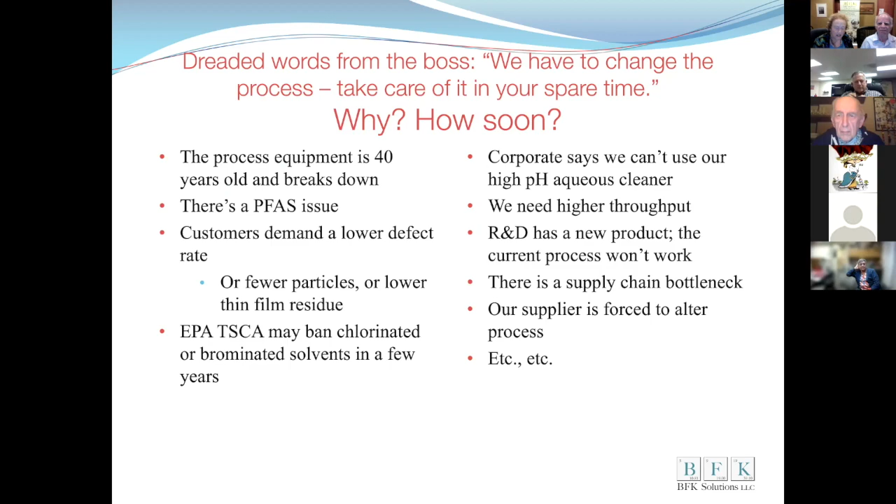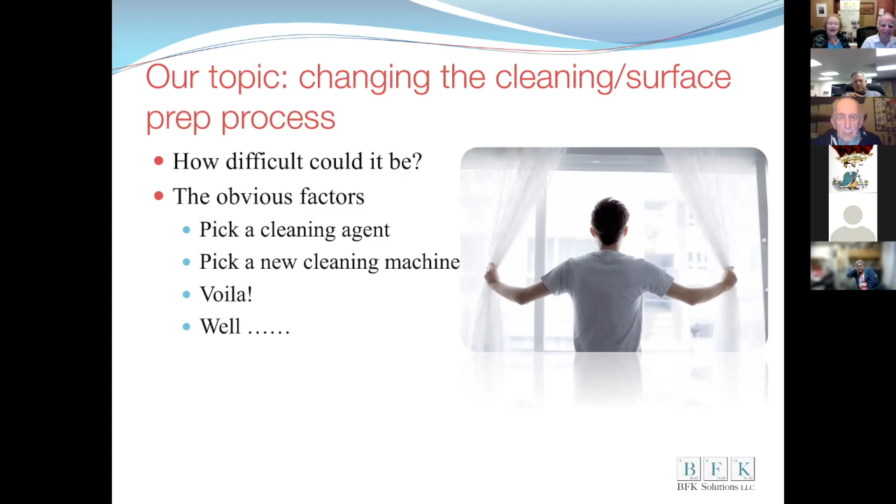Next. So you know that our field is cleaning, surface prep, critical cleaning. So that's what we'll talk about. The slant of this presentation is cleaning, but the approach applies to pretty much whatever you're doing. But how hard could this be? Your boss may say, pick a cleaning agent, pick a new cleaning machine, and voila. Well, unfortunately, next. Things can go wrong.

So we have a few what we call ideal scenarios. And these are some of the things that involve the costs other than the equipment and the chemical. And we say ideal because we're saying that everything or almost everything goes right, or goes right the first time. These are estimates. They're not really case studies, but they are based on our experience, our observations in critical cleaning and surface prep. And as we've said, the principles that we talk about here apply to other processes as well, not just cleaning.

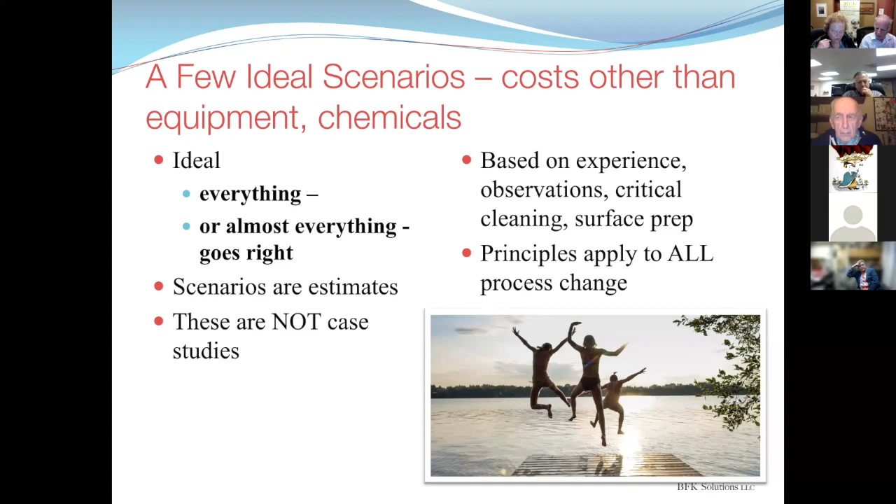But your team has to have the right people so that you get all of the players that you need at the table. You need to begin with the end in mind. In the case of cleaning, it's how clean is clean enough. And the important 2 C's, communicate and coordinate, always necessary.

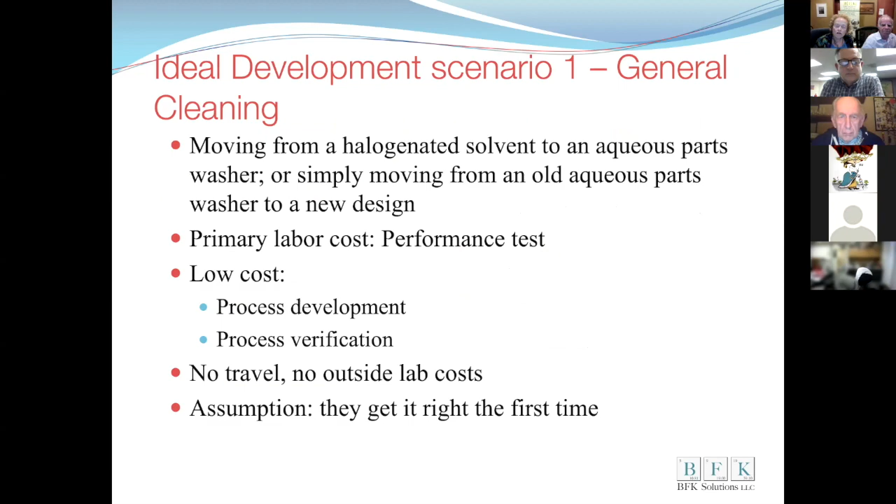Right, beyond the equipment. And now the second one is also with a general cleaning application, but switching from a halogenated solvent to a non-aqueous process. And we're assuming that we're going to be using a flammable solvent for this. Because a lot of halogenated solvents are under the gun and may be heavily restricted and or banned. And a lot of the replacements are flammable.

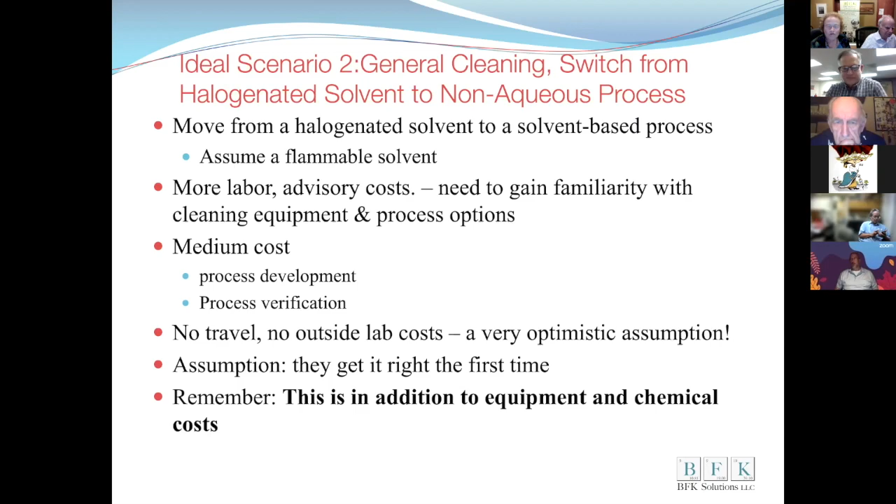So there's more labor and advisory costs because we figure you're going to have to take more time to learn about the cleaning equipment and process options. We're figuring medium costs for process development and verification. No travel, no outside lab costs. This is real optimistic. Again, this is home and garden television. You solve it in a short time. The Property Brothers come in and fix up your house in shades of gray, black with bright colors, and it's gorgeous. But again, here are the costs without equipment and chemicals.

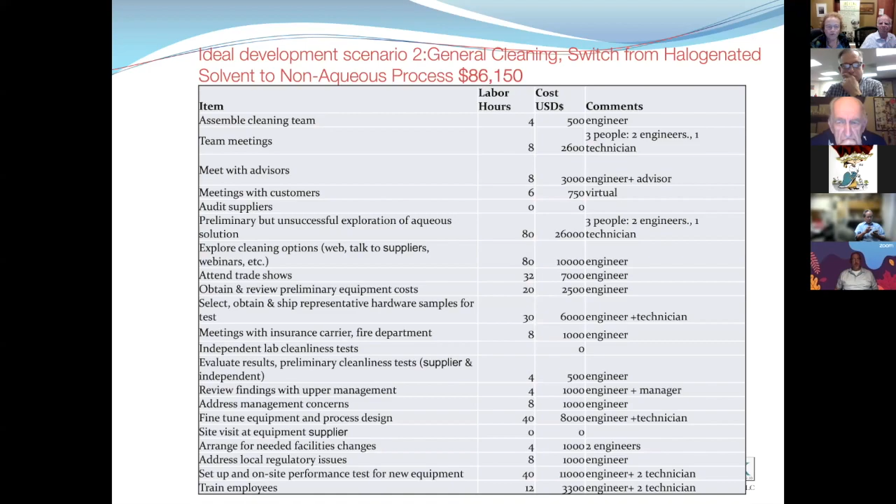And now we're at 86,000 because it's a more complex project, and there are a lot of different things that you have to consider when you're dealing with a new solvent or flammables. And that's in addition to buying, say, a small flammable solvent degreaser, which starts at a couple $100,000 and then moves up. And it allows for things like fine tuning the equipment and training the employees because it's different. It's a different process.

So then we get into what we'll call high precision. Again, moving from a halogenated solvent to low flash point, but you've got lots more regulatory and permitting issues. Maybe you've got NADCAP involved. We're assuming that the manufacturer understands the process not just downstream, but upstream. So you know what your suppliers are doing. That is not an automatically good assumption.

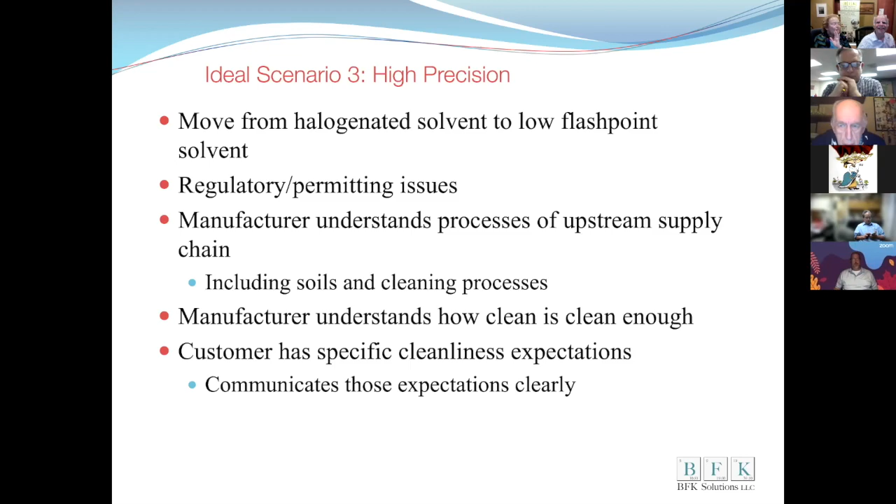We also have to assume that you as the manufacturer understand how clean is clean enough. Sometimes you know it's clean enough, you're not sure why. And then we have to assume that the customer has specific cleanliness expectations and communicates those expectations clearly, intelligently, and rationally. Again, we're in Disneyland, but next, please.

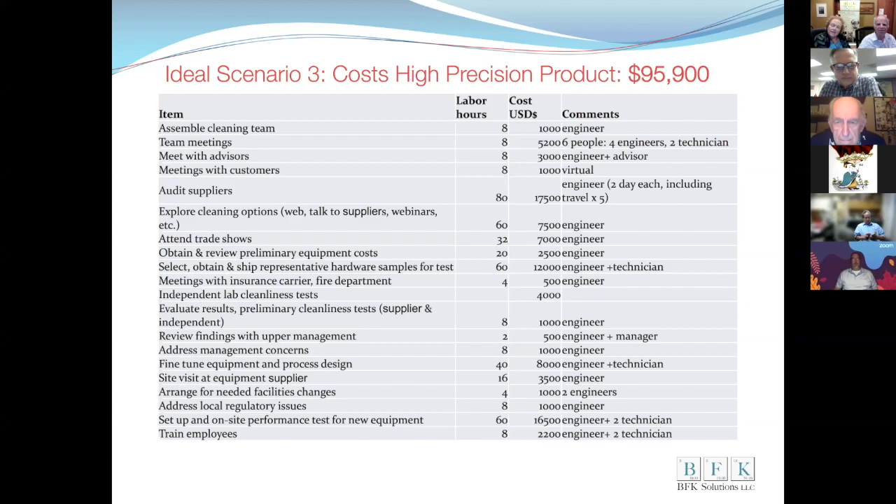So again, we've moved up to 95 to nearly 96 grand, and we're getting into auditing the suppliers, talking to suppliers more and more, trade shows, that kind of thing. You can say you're all wet on this, Kanegsberg, but this is based on things that we've come up with, and it's pretty optimistic. And these are also things that people don't really track because different parts of the company are involved.

But everybody thinks, oh, we have to be worried about the cost of the equipment. We have to be worried about the cost of the chemicals. These are not in these charts. This is worrying about the cost of not messing around and doing it right the first time.

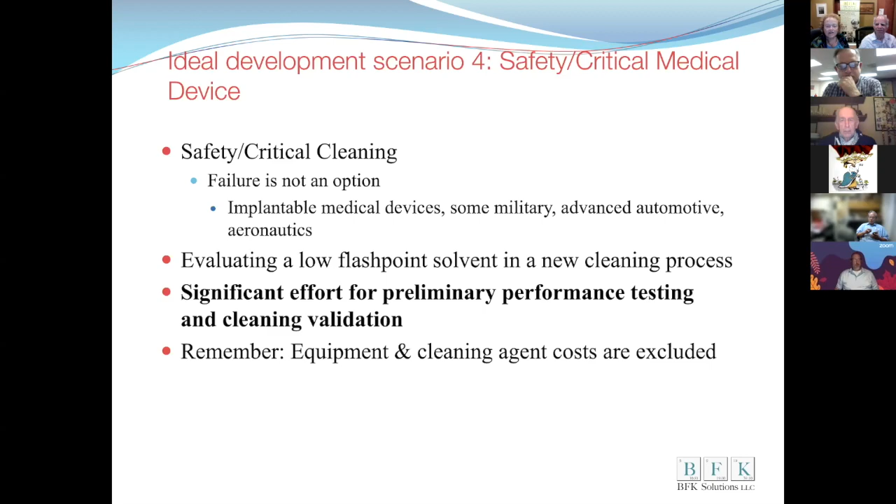Now, scenario 4 is safety critical cleaning, things like medical devices, some military, some advanced automotive, aeronautics. Safety critical means people's tushes fall off if it doesn't work. Yeah, it's got to work. And we're assuming that they're moving to a new low flash point solvent because, again, a lot of the halogenated solvents are under the regulatory gun. And there's a significant effort for preliminary performance testing and cleaning validation. And again, cleaning agent and cleaning equipment costs are excluded. Next, please.

So we've made some really hilarious assumptions here. Everything's right the first time. The final fabricator and key suppliers work seamlessly and harmoniously. There are no false starts. There are no mistakes. People say, I'm going to choose this piece of equipment, this cleaning agent. They get it right the first time. Management doesn't get squirrely or change its mind. And if it's medical, the FDA is deliriously happy and has no comments, no reservations, and wants no changes.

So this comes out to more like, we're assuming we're at an implant, close to 300,000. And if you have 2 different medical devices, you've got to repeat the evaluation. In red, there are some additional tasks here because of the validation and testing and addressing any concerns from the control agency, whether it be FDA or the military, whoever's involved. So there are very significant costs at that level. So we're being very optimistic. This is when everything goes right. Again, highly idealized and optimistic. The costs, even for well-planned projects, can be much higher.

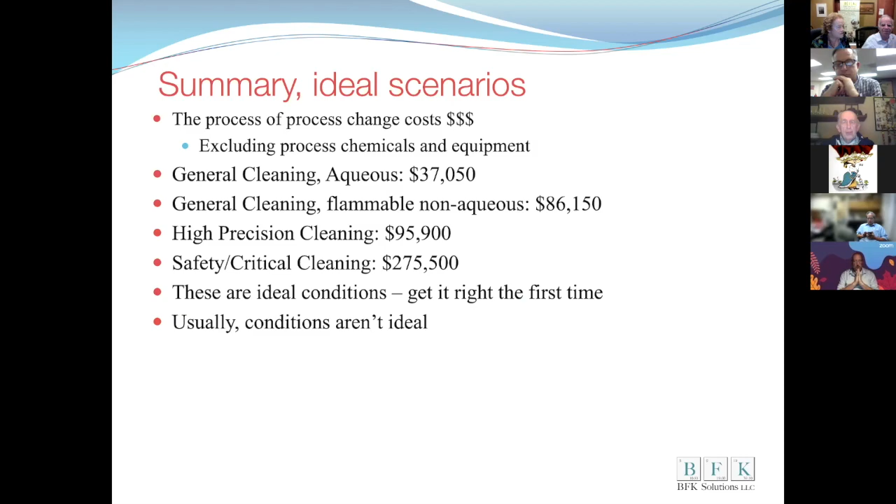So for general cleaning, 37 grand for going to a new aqueous system; going to a flammable system from, say, halogenated, 86 grand. Then it goes up to 95 grand for high precision. And when you get into the really heavy duty safety critical category, upwards of 275 grand. Usually conditions are not ideal. Right. So these are all what happens when it goes right.

But what can go wrong, especially if we take some shortcuts? Absolutely nothing. And that's the main topic of my presentation. This is my favorite. This is what's gonna get the grandkids through postgraduate school.

The company president said, I just played golf with the vice president of marketing at Whammo Clean. And he says Whammo Clean XL equipment costs $250,000 less than what you were thinking about. And the rep guarantees it will clean all of the soils. And the rep says that in the last 12 months, there have been 200 new Whammo Clean XL installations across the US, and they all work perfectly.

So the boss says, don't bother with a cleaning team. We're advisors, we can do it all. Don't worry about that regulatory stuff. We know what the customer needs, so don't spend time there. We know we're going to get the Whammo Clean, so don't bother with competitive bidding, and we don't have to bother with testing. Because the rep said it always works, 200 times, never a failure.

So we started with this. This was our ideal situation without these shortcuts, 96 grand, and the boss said, yes, it's sizable. 96,000 bucks is not peanuts. And so what happens when you apply these shortcuts? Wow, you can go down 80%, down to 21,000. Real cheap, by cutting out a lot of those steps. And so that's what happens if it works.

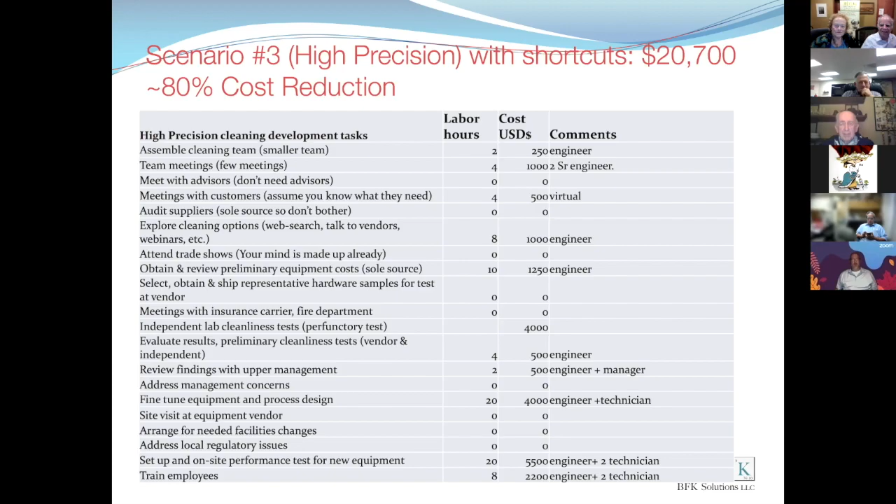If it works. And they might, but much more likely when you start doing your shortcuts, they backfire. And it means you're gonna have to start over, taking more time, more money. You're gonna have lost business.

You may need to make some last minute emergency decisions, which always cost a lot more than you planned and still may not be ideal. So you're winding up spending a lot more time and a lot more money.

So the bottom line here is with the so-called ideal scenario, maybe 96,000, you might have been able to go down considerably below that, but recovering from those shortcuts can really sock it to you at over 200,000. So you wind up, instead of saving 80%, you're spending more than twice as much.

And frankly, we've seen things that cost even more than that. People wander in circles again and again. And you're wasting valuable time and your own reputation, which is not part of this.

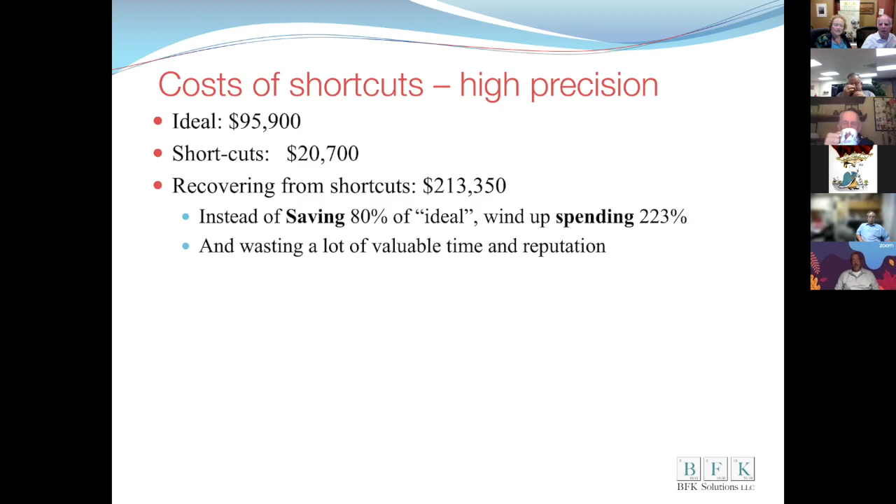So this is, we're actually done, I think, with the god awful Excel spreadsheets. Yes, we are. Apologies for those.

But this is something that's come to our attention, and it's nothing that we have done, but there was a study of a metal finisher that was attempting to replace solvent degreasing. They had mixed substrates: stainless steel, carbon steel, copper, brass, assorted aluminum alloys, we think. They do anodizing, plating, powder coating. They cover general industrial, automotive, and medical, real eclectic.

The pinch point is that they've got a lot of heavy oils and polishing compounds, and currently they degrease in N-propyl bromide. We'll tell you a little bit more about that later, but that is under heavy regulatory scrutiny by the EPA.

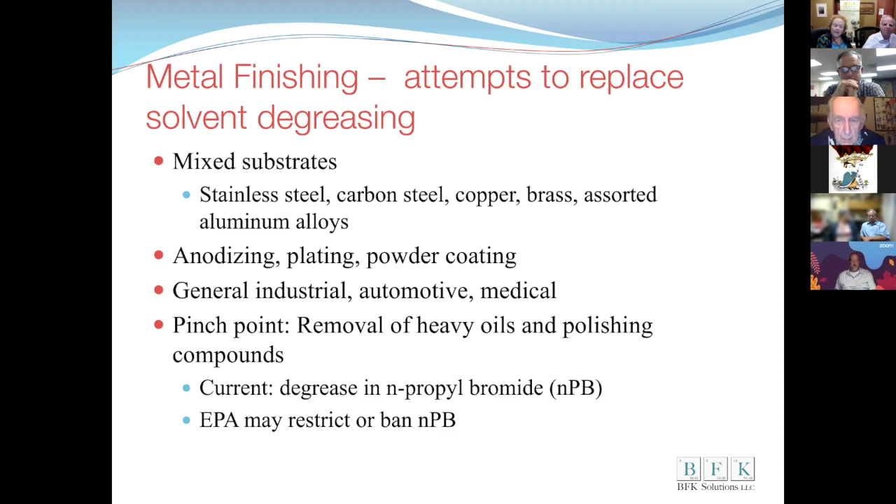So the way it was recounted, they did a little bit of testing of highly alkaline aqueous cleaner, because they had real heavy lubes and polishing compounds with a grit in it. So a cleaning agent supplier tested this thing that was like pH 12, 13, something like that, mild, not really. And it took the stuff off. I don't know if they tested for materials compatibility or not, but the dirt went away.

They rejected a relatively sophisticated equipment because of the cost: immersion, agitation, ultrasonics, multiple rinse, I think no dry. Very limited testing by the equipment supplier. They shortcut by selecting a single tank ultrasonic system with immersion and ultrasonics, no rinse, no dry, and they thought about adopting it without any testing.

Then we get into rinsing, and there are a lot of water folks around here. So they thought about shortcuts. They went from an industrial immersion tank with ultrasonics and no rinse, and they were going to hose it down with hot tap water, which is so much fun with aluminum.

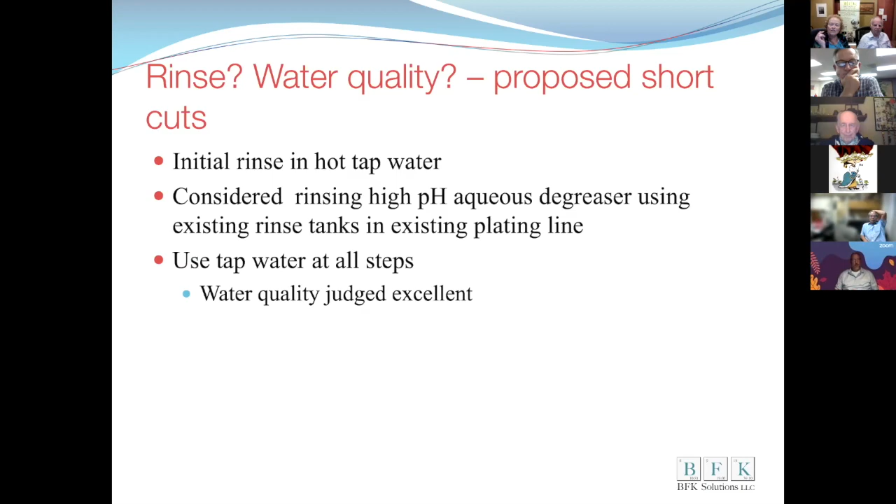Then they considered also rinsing that high pH aqueous degreaser using the existing rinse tanks in an existing plating line. And they were going to use tap water at all steps because the water quality was judged excellent. So the bargain process was thought about, but hasn't been tested or adopted.

What might go wrong? Well, as soon as you get into degreasing mixed metals in aqueous, it gets a little more challenging. You've got to be more careful. You can have materials compatibility problems with different cleaning agents. You can have galvanic effects from the product mix. Aluminum is a royal pain, and alloys behave differently.

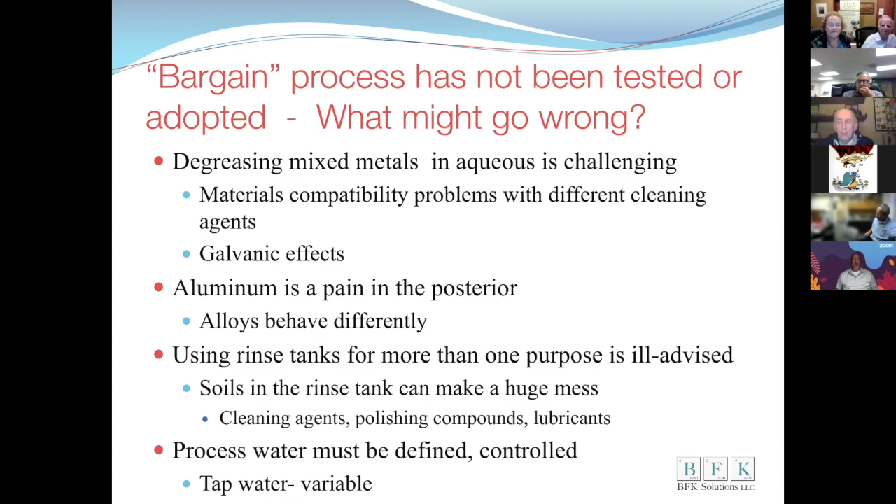Why are shortcuts bad for business? Why don't we have to bother with a cleaning team or advisors? Well, you wind up with poor, uncoordinated decisions. We don't have to bother about regulatory stuff. You wind up being shut down,

having process delays, fines, and we've even found some cases of prison. It gets beyond that. And at the very least, your in-house safety folks can stop you from adopting the process, saying, we don't like this. So we don't worry about talking to the customer. We know what they need.

It's always good to communicate stuff like this to the customer because they can get irate, you can lose their business, and the competition wins. What happens when you don't competitively bid? You can get really dreadful process equipment. You might pay too much. You might get the wrong equipment for the job. You can sometimes get poor product support for the equipment. So when things need fixing, it can be a problem.

And when we say competitive bid, we're not just talking about the price. No, we're talking about evaluating: what does it do? Does it do the job? That's a good point. Does it do the job well? And is there customer support from the vendor of that equipment?

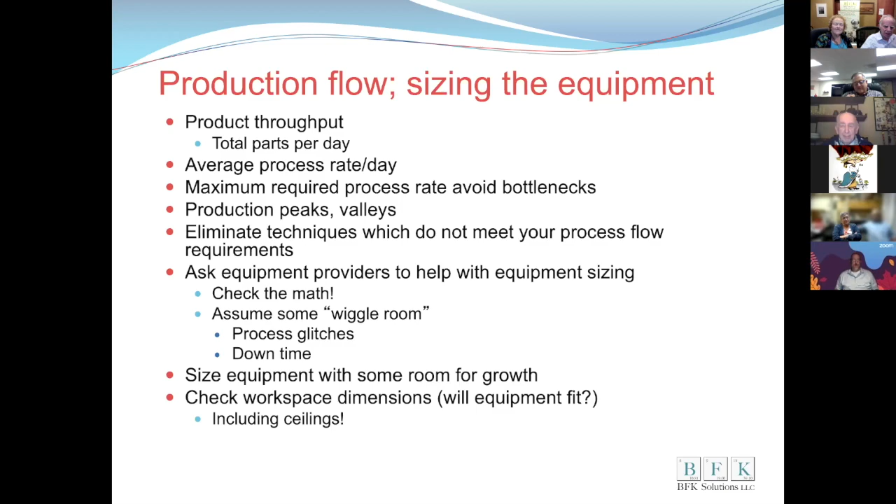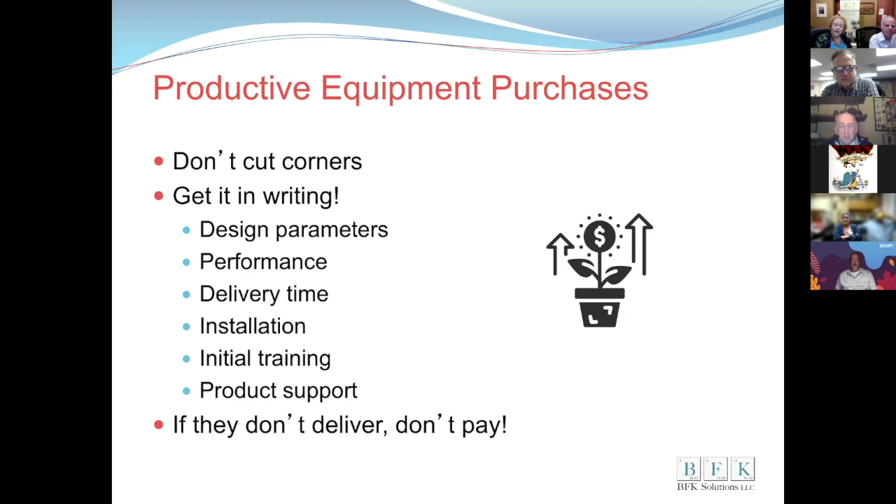So don't cut corners. That doesn't mean you get every bell and whistle. Really, it doesn't mean you just buy everything. It's not like buying a sports car. But get it in writing, including the performance, the delivery time, the installation, the training, the product support, and if they don't deliver, don't pay.

So here's a few examples. One large aerospace company didn't use a supplier with pertinent experience. It was a good supplier, but he was not experienced with that kind of equipment design. They poured 300 grand into a bottomless pit beyond the cost of the equipment. They couldn't get it to work. The supplier says, don't worry. The requirements and product support were not adequately specified in writing. The equipment leaked. The parts manufacturer had to do the troubleshooting.

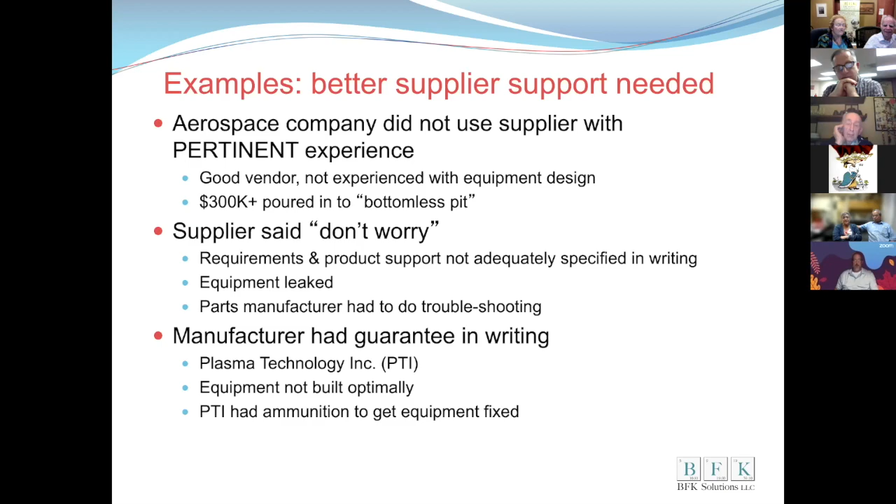Plasma Technology, who we can talk about because they've published with us, had the manufacturer guarantee performance in writing. Was the initial build absolutely optimal? No, because it was custom equipment. But PTI had the ammunition to get the equipment fixed, and it's been running great for a couple of decades now. Next.

Okay. One of the things about manufacturing is you look at your own facility, but you don't look at what happens upstream, what happened before. And you may not look necessarily at everything that the customer needs. So the cleaning process has to be collaborative. Specifying the cleaning in the contract is important. Auditing may be necessary.

We've had situations where purchasers had the brilliant idea of going with cheap generic suppliers. And then they wonder why the costs are going up, because the quality isn't there. If you're in the supply chain, become the solution, not the problem. And that may involve tactfully educating your customers as to why you're doing what you're doing. So you want to partner with your suppliers.

Select them intelligently, collaborate with them, because you can't always audit them, partly because of secrecy and intellectual property. They know what they're doing, but they don't necessarily have to tell you every part of it. But you must get them to at least agree, even if they don't tell you all of the details, get it cast in concrete so that if they make any changes, they let you know. So you have a chance to look at what the change is, because you may be changing a process that you don't know.

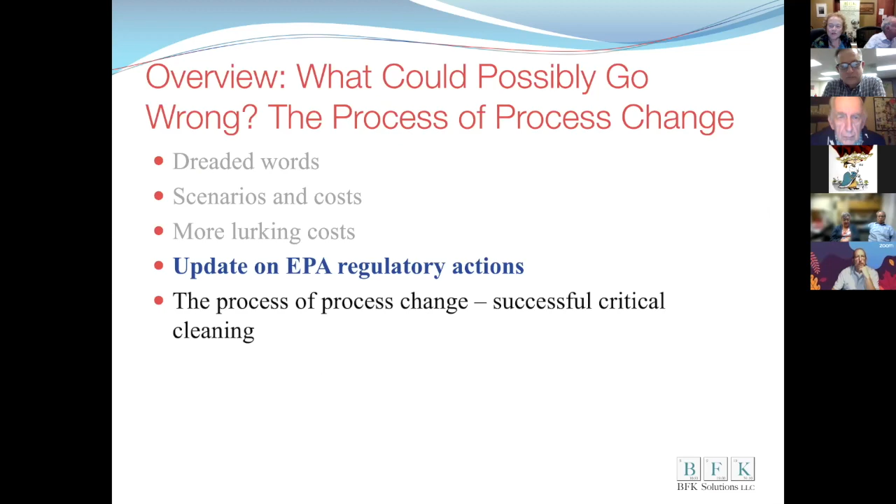What is TSCA? It's the Toxic Substances Control Act, and TSCA may result in trauma, but it is not an opera. Now, this is for those of you folks who are out of state or who think you can leave California and avoid this. What we're talking about right now affects the entire US. So it's not just California.

It has sweeping authority over environmental and worker safety, just like OSHA does. So this is called TSCA reform or amended TSCA or Lautenberg would be the terms you'll find it under. Next. So remember I mentioned halogenated solvents. Well, N-propyl bromide, methylene chloride, perchloroethylene, and trichloroethylene are set to be highly, highly regulated relatively soon. And that's based on bipartisan congressional mandate. And I do mean bipartisan, it happened not too long ago.

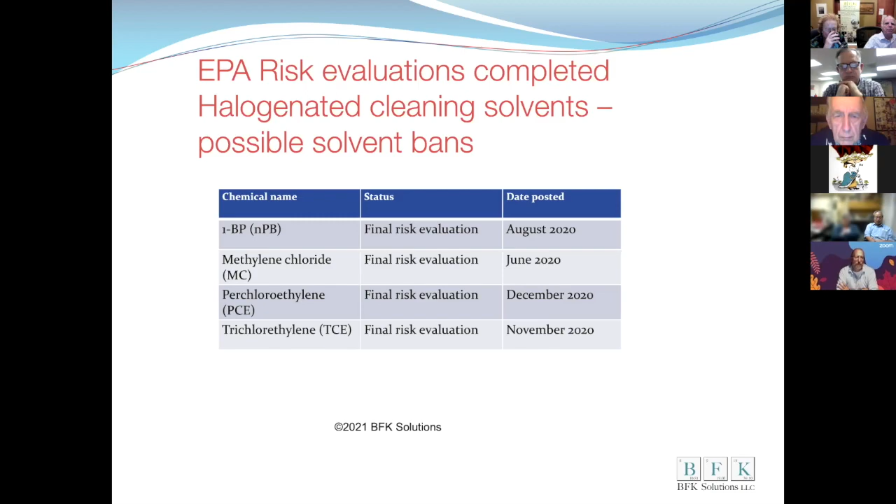Could be banned. So they've done a final risk evaluation on all four of these that was completed last year, 2020. And so they're now in the risk mitigation phase of figuring out what they're going to do about it. Now, why are we concerned with it? Well, for one thing, their actions can impact our clients in the manufacturing community because we deal with cleaning agents, cleaning equipment, costs, evaluation. But also, chlorinated solvents do stuff that other solvents don't.

They clean real good. So a lot of the parts that you find easy to plate or anodize are easy to plate and anodize because somebody used a strong solvent that gets into all the little nooks and crannies. And it's kind of like life is getting a little too exciting on this.

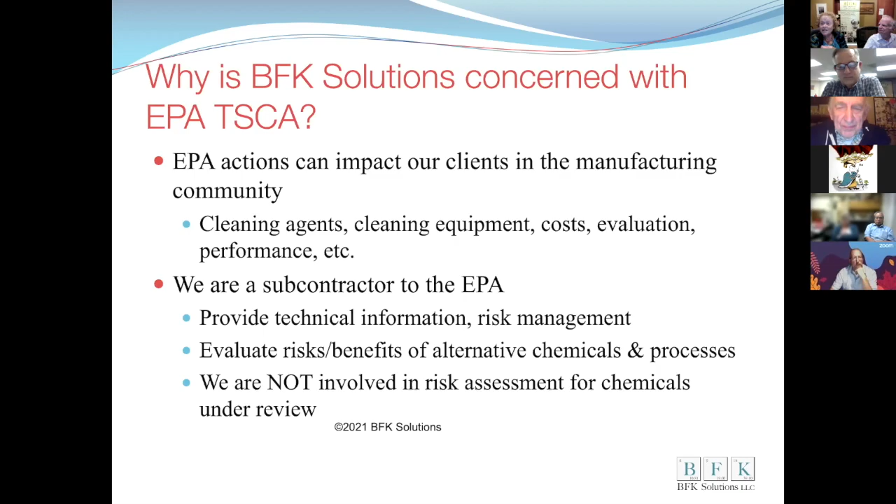The other thing is we're a subcontractor to the EPA. We provide technical information about risk management, about flashpoint, about solubility, and we've been involved in evaluating the risks and benefits of alternative chemicals and processes and the costs. We are not involved in the tox risk assessment, nor are we the EPA. We don't run it, so don't blame me, please.

But what can they do, and what are the timelines? Well, they can ban the manufacture, sale, or use. We're not sure yet what's going to happen, but one of the possible scenarios is that of those four chemicals, methylene chloride, N-propyl bromide, trichloroethylene, and perchloroethylene, only the PCE will be allowed, and then only if you're using it in an airless cleaning system, which means an expensive piece of equipment. It means it's very non-emissive. You lose practically nothing. It's like a roach motel of solvents.

So it looks like the rules will be in by the end of '23. There probably will be a timeline, probably not a sudden cutoff. And what's left? Well, there's something called trans DCE, and that's blended into the fancier designer solvents to make them work without catching fire. But trans DCE is very similar in structure to the stuff the EPA is regulating, and the EPA is looking at trans DCE. So what will be left?

Darn little. And already we've gotten a few phone calls from people who are using trichloroethylene, and one of the manufacturers in the US, seeing the writing on the wall, is no longer making the stuff, and all of a sudden it's like, help. People are still using it, but they don't know where it's still legal to use it, and they don't know what they're going to do. So they have a last minute process change, and they've got to scramble. So under what can go wrong, that's a biggie.

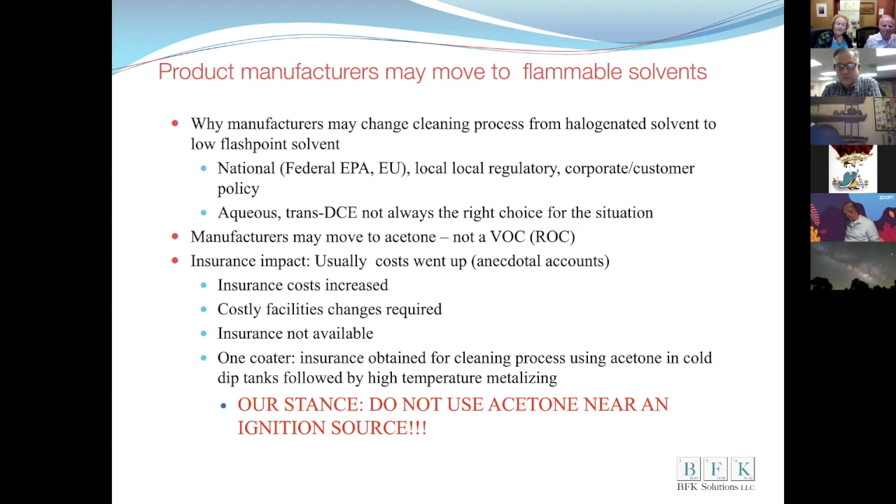Some manufacturers may move to acetone because it's not a VOC. There is a flammability issue. Usually the costs go up. Sometimes there are costly facilities changes required, which we didn't include in the other analyses, or insurance may not be available. One coater was actually able to get insurance for a cleaning process using acetone in cold dip tanks, followed by high temperature metallizing. What could go wrong? Our stance is, don't do stuff like that. It's not a good idea.

Next, please. Insurance. Yes, we've actually looked into insurance as part of this project, and that's been a magical mystery tour. We've spoken with folks in E&O and liability insurance, and a really good trial attorney. One thing about flammable versus a carcinogen: problems with flammable solvents have an immediate dramatic effect. The injury and death impresses jurors, and that can be immediate and have long-term consequences. So insurance is likely to increase. How much? We don't know. Nobody knows, or nobody will tell us.

So in conclusion, honest, we're getting close to the end. How to change the process without breaking the bank. Coordinate, communicate.

So back when we were remodeling our house, we made a trip to a marble yard. This was back in 2002, and it was a major remodel. And me being me and liking to coordinate things, I brought little samples of tile and wood and hardware, because it's easier to move little bits of tile and wood and hardware than it is big slabs of marble and granite.

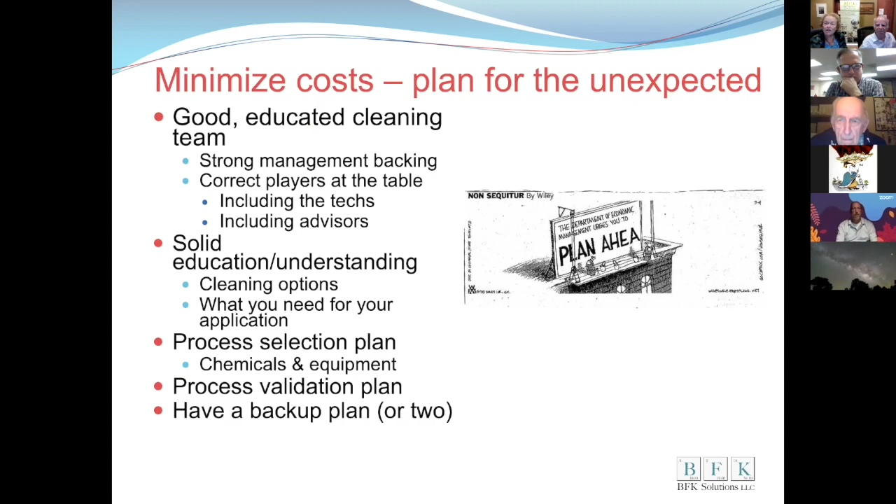So we're to the ever popular question and answer period. And let's see, can we get back to the, yeah. Good, and the recording light is still on, so hopefully we'll. So are there any questions, everybody? No one? Nope.

I have a question for you. Okay. So you referenced the nPB and the other TSCA-related solutions or chemicals. Do you have an estimation at this time as to when they may be banned or phased out, I should say? We're starting to look at that. No, I think it's likely to be sooner rather than later. So we run into two extremes. People who would like you to buy some other cleaning juice and buy a new cleaning machine say, oh, it's going to go away right away. It's going to be banned. You're going to go to prison, do something right away. Switch. It usually is accompanied by, I've got the solution, switch to it, it's going to be right away.

I don't think it's going to be an immediate cliff. I do at the same time take issue with people who say, oh, the EPA takes its time. They can take decades. That is true to a point. This particular legislative thing, rule, law, whatever it is, everybody on the right and the left seems to like it. So please don't say I should have voted for who I didn't vote for, because everybody seems to like it. And so saying that you're going to have a couple of decades, I don't think so. They've pretty much lit a fire under the EPA. And because it impacts both environmental and worker exposure, it takes us straight into OSHA land.